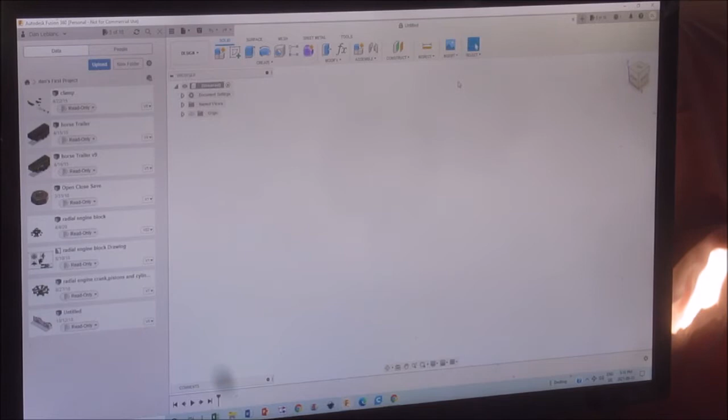The face, then select image to import. So I'm going to get my image, and if I look through here, insert from my computer. So here I am on my desktop, and it's the latest photo, the image here, and I do believe it's this one.

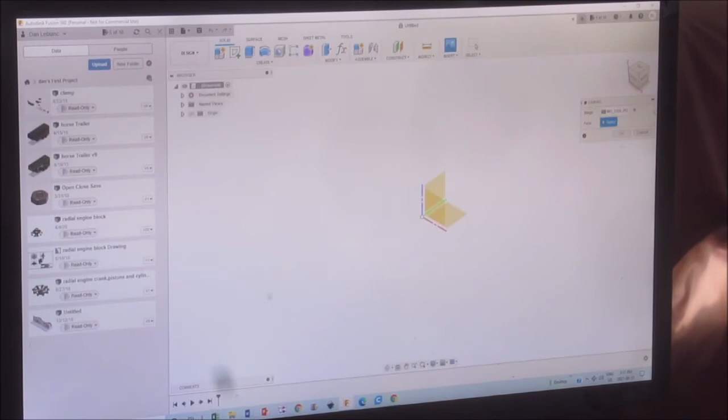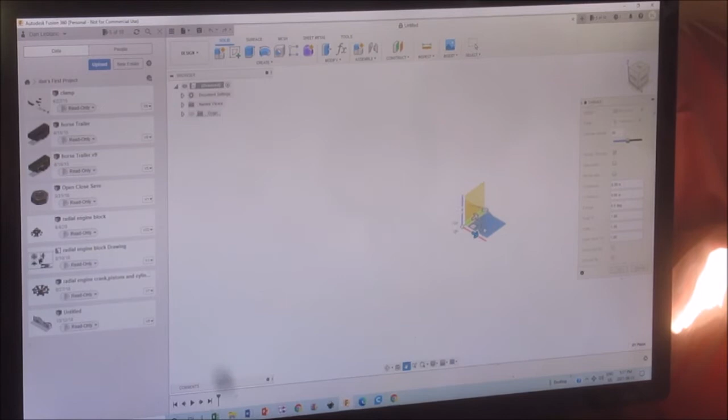Now I'm going to select the plane on my XY plane, and there's my canvas. I'm trying to zoom in and it's not working - I think I'm crashing. No? Oh, way too late. You really got a high resolution in that picture, huh? So I'm going to say OK to this and bring it into view.

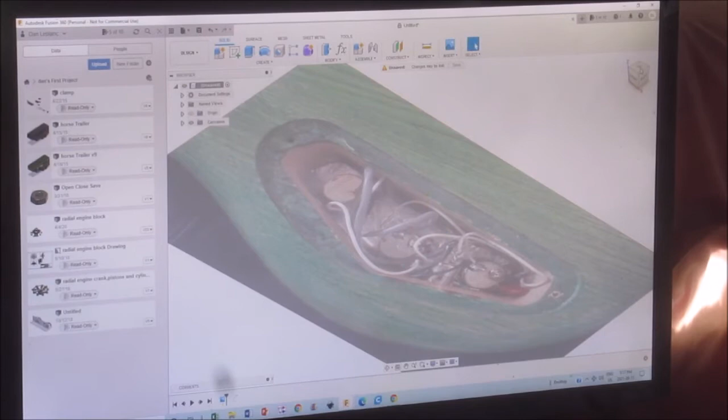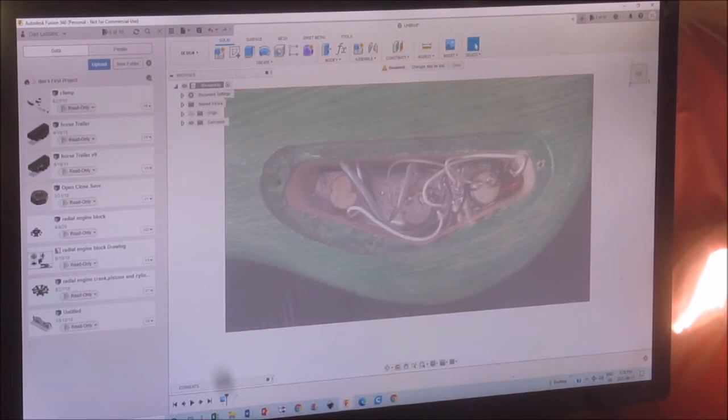It's computing graphics, and there it is. Now I'm going to draw an outline around this. And as you can see, they put an aluminum sheet or conductive sheet, and put a little capacitor in the corner and grounded it off, so it doesn't pick up any noises in the wires and whatnot.

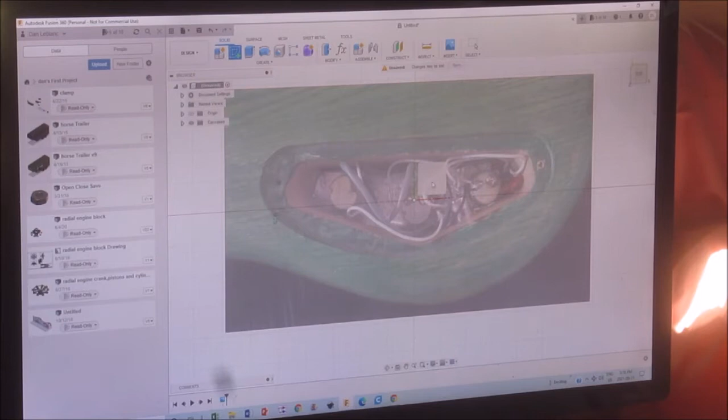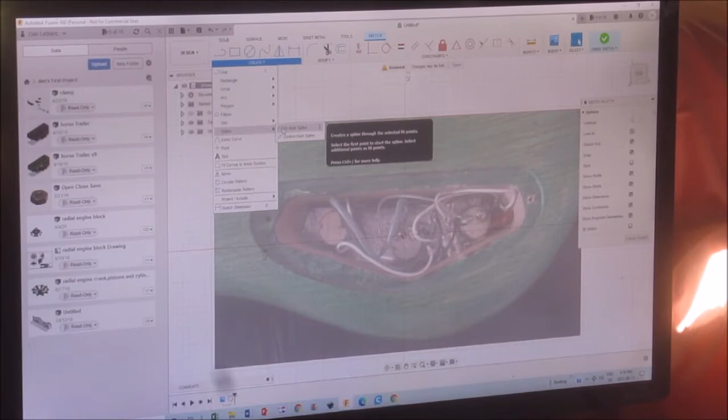Now I'm going to create a sketch here. And I'm going to use a function, not line, but spline - it creates a spline through the selected fit points. It says select the first point to start the spline and select additional points as fit points.

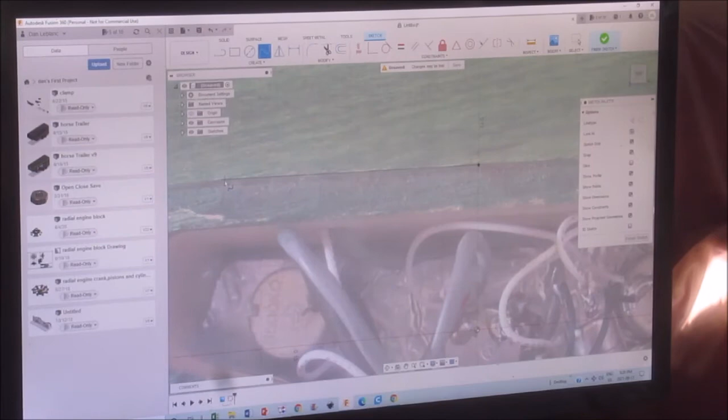The more detail I can put into it, the better it's going to be. So I'm assuming that's the correct line for it.

Look there - and there seems to be a little, it's still snapping. If I hit control, I can do a better job on this. I can sort of start giving it curvature so I can follow the outline of this drawing, and I want to keep it pressed.

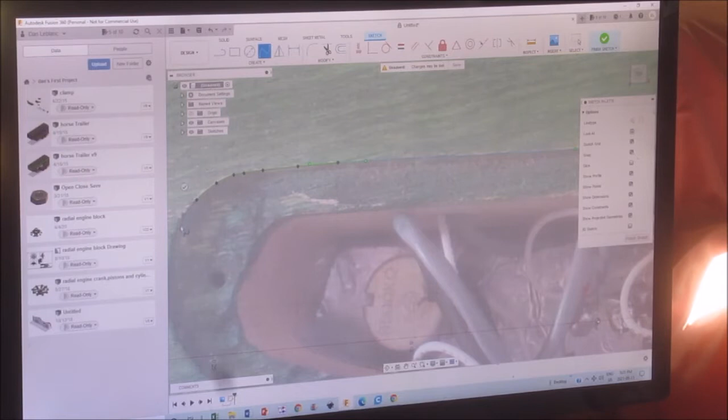So you sort of get the gist of it, right? I'm just following the shadows.

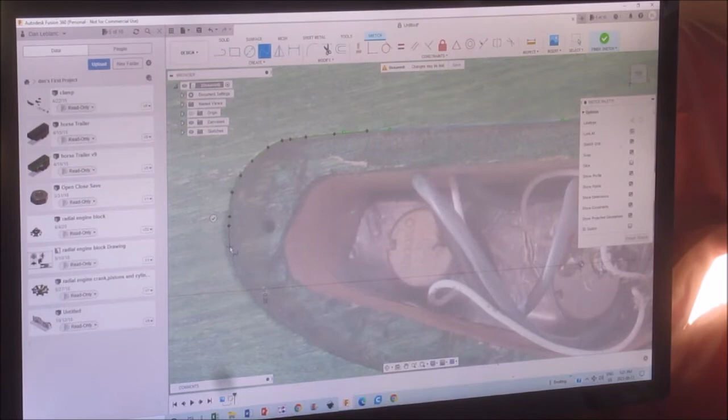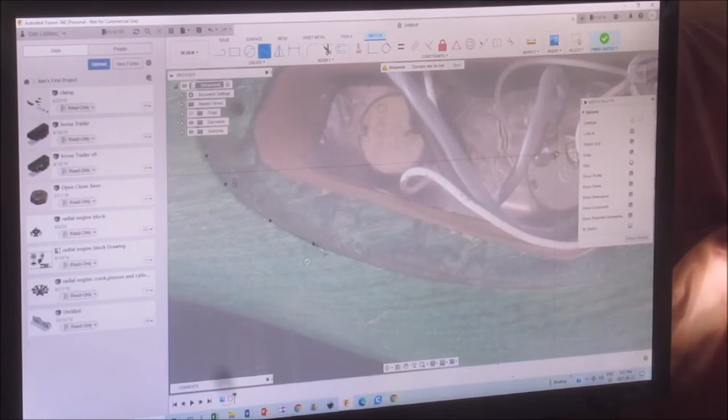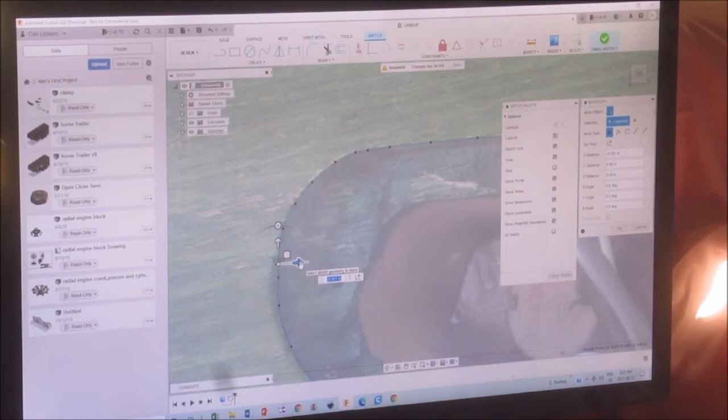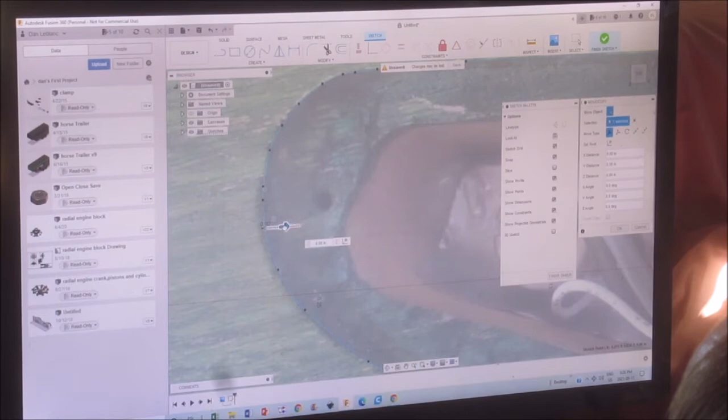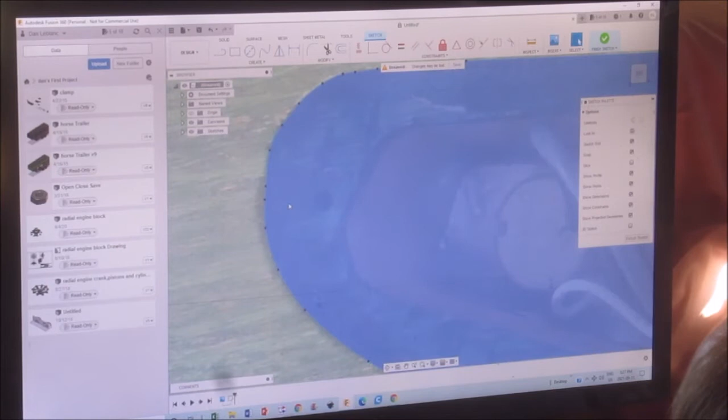I'm seeing here, you see it right there. And if I click on this one again... oh, I grabbed two at once. Here, pardon my language.

Some things I need to know, right? Like I said, I need to know the space between these two bolt holes. That'll tell me what scale to put my canvas to, and then all these proportions that I draw out on my canvas will be directly related to the real size of this plastic piece.

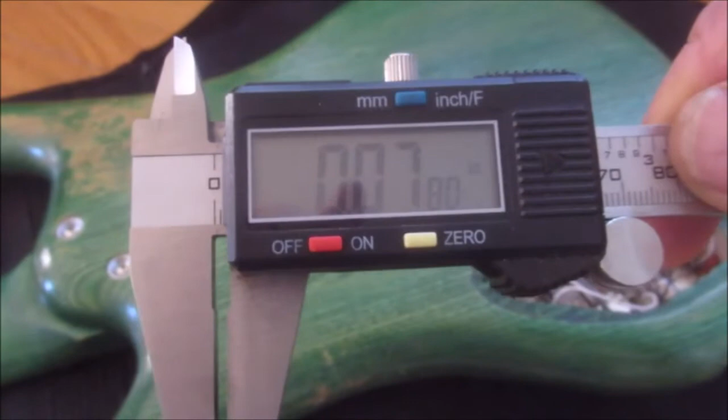And then I need to know, see that? That's a depth gauge at the end of a vernier. So I need to know the depth there, and I get a reading. It's 78 thousandths of an inch. Okay, I have my depth at 0.078.

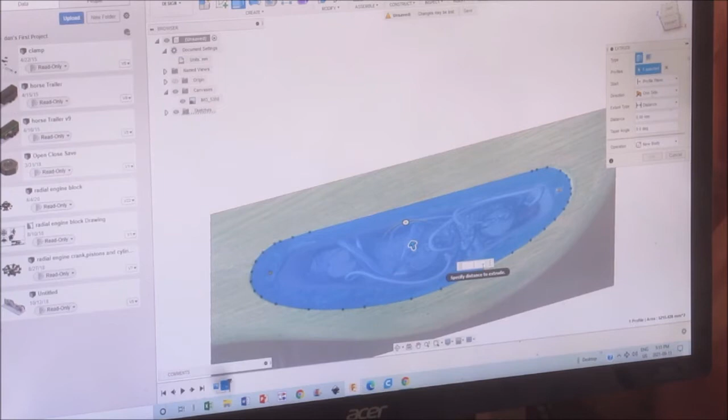I can finish my sketch right here, and then click on this. I want to press pull, and I'm going to go—it's in thousandths, 0.078 thousandths. Click OK.

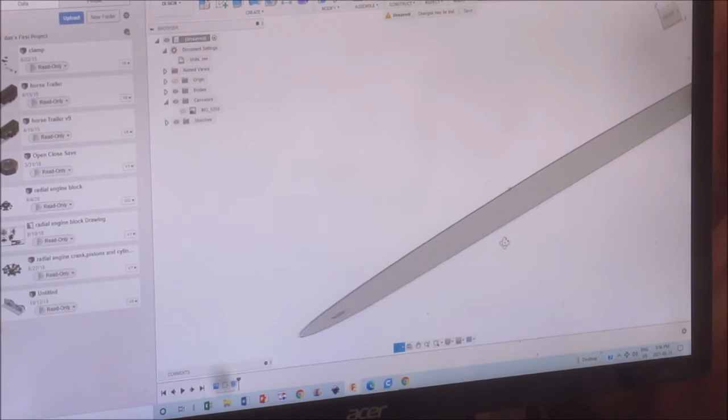And if I turn off my canvas, I have it here. Okay, and I want to measure, make sure—select that edge to this edge.

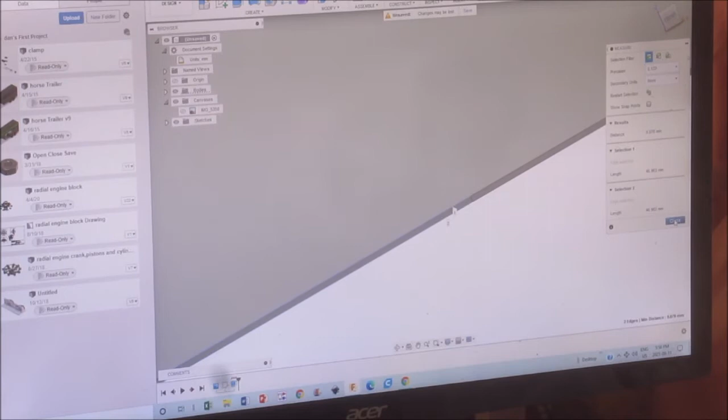Okay, now it says in millimeters. I should have typed in inches. I thought it seemed a little bit thin. So I'm going to go here to my press pull and edit this feature. And now, instead of putting millimeter, I'll put inch. Click OK. Now that looks a lot better.

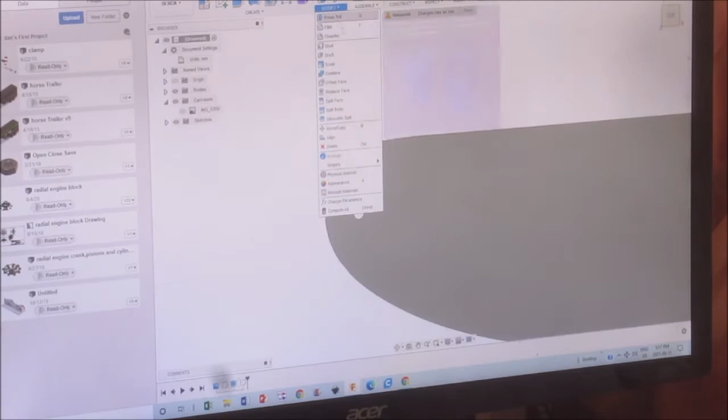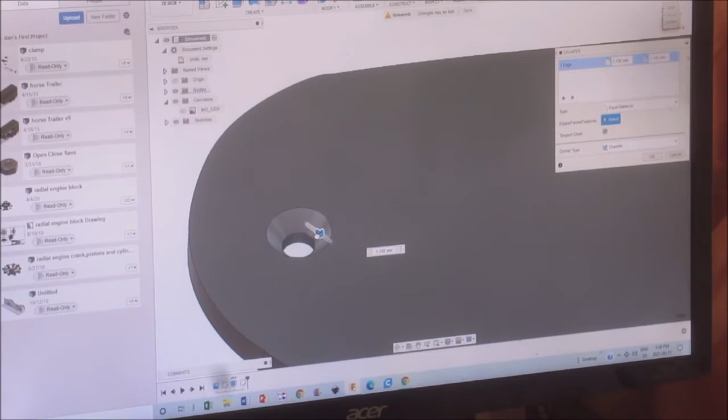That looks like the real deal. Modify this feature, I can put a chamfer. So if I select the edge of this circle and bring this into view, I can chamfer this hole as such. I'm going to click OK.

And now I want to see the OD of this thing. Radius 2.8 millimeters. So I'm wondering if this will work. I don't have the screw, so it's kind of difficult.

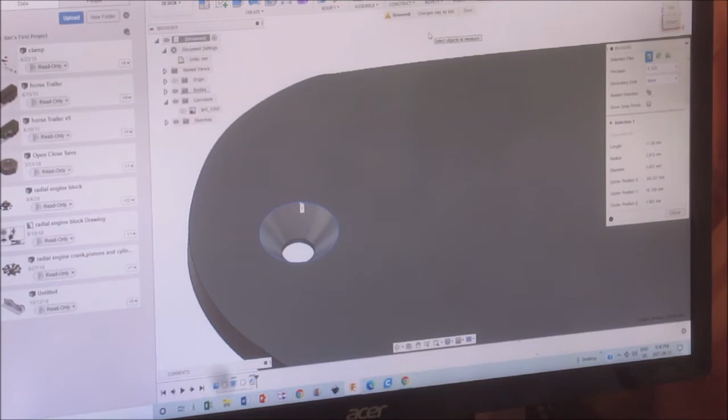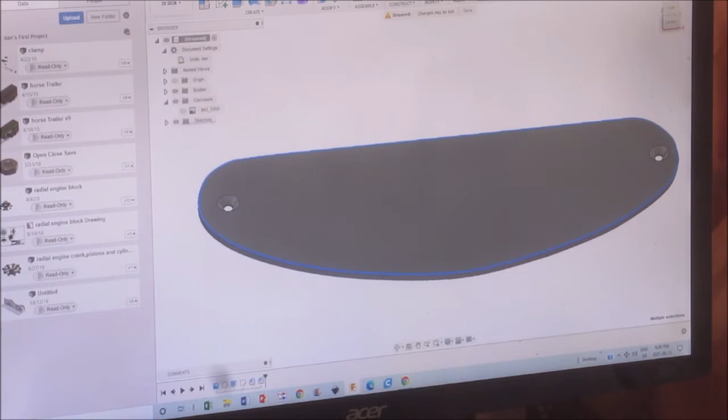And repeat this over here. Can I select these edges? Yes, I can. And I'm going to select these edges, and I'm going to put a fillet on these. Modify, fillet, a very small fillet. Oh geez, my selections went away.

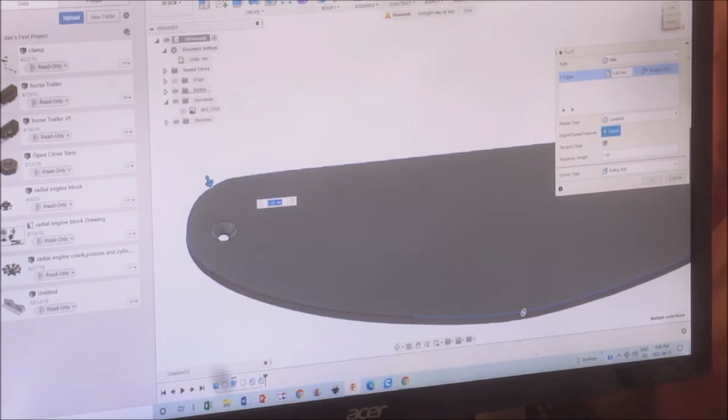Oh, I can choose the format of it, right? STL binary, STL, or 3MF. 3MF means manufacturing, I believe—3D manufacturing. And a refinement is medium, which is fine for this. I can preview the mesh if I want.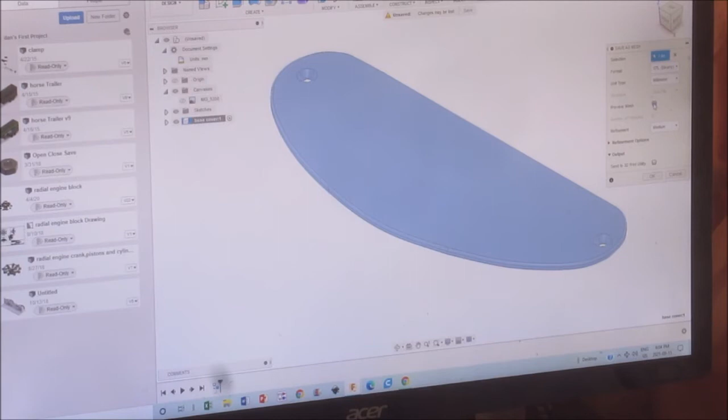Number of triangles, nothing happened. If I say STL binary, create a mesh—there it is, 6,124 triangles for this piece. And I want to save it. I'm going to click OK.

Here we are on Cura. And there are—oh, I got a new version of this, 4.11, and this is 4.9 version. Okay.

I'm going to be using black PLA, and it is eSUN black PLA. And the nozzle here, if I go to here, I can set nozzle sizes anywhere from 0.2 to 1 millimeter nozzles. And it's black PLA. Okay, I have all these manufacturers I can choose from, and I chose black PLA from eSUN.

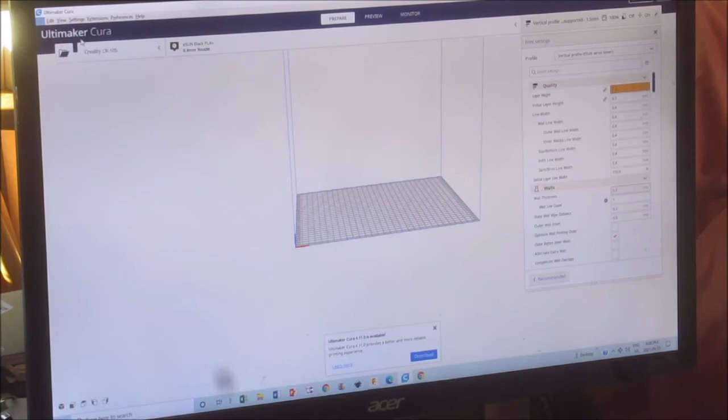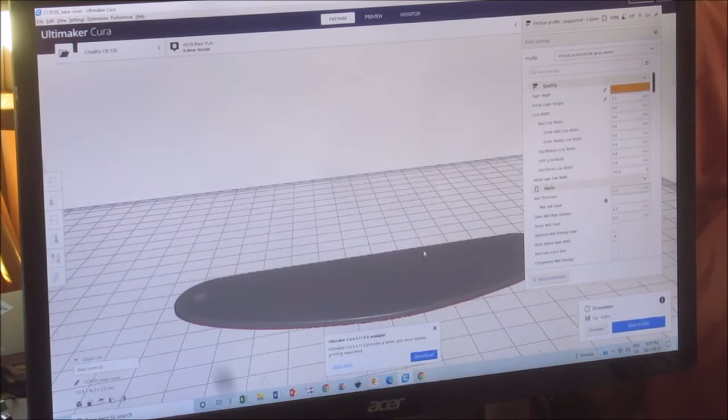And I'm going to go get my file, open file, and the file's on my desktop, and it is right here, CCR10S base cover, STL model. Click on that, open that, there it is, and all I have to know if it's flipped upside down or not, and it's not. Okay, now since this is somewhat thin, I don't want it to warp.

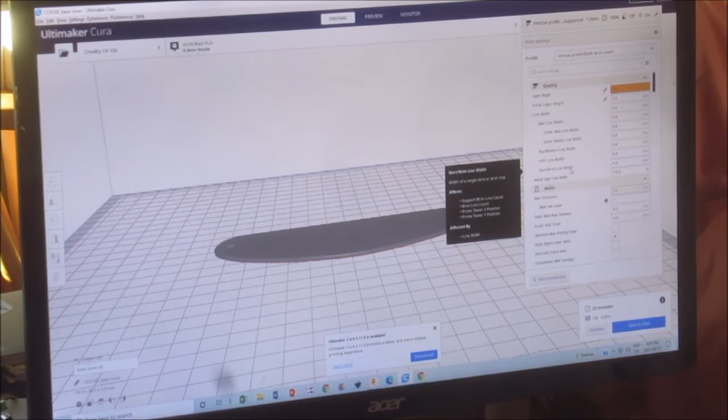So you want to make sure you have a brim around this which dissipates the heat. Okay, brim skirt line width—width of a single skirt or brim line. So I'm going to scroll down here and go to...

Infill density, I want 100%. That's where you might get elephant's foot, they call that, when it starts peeling off the corners. I hope it doesn't happen.

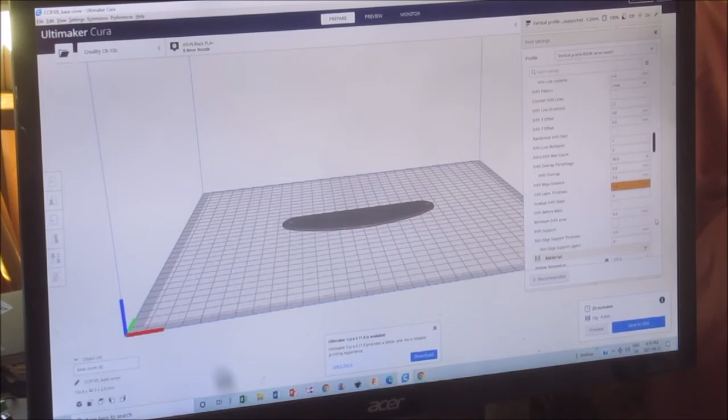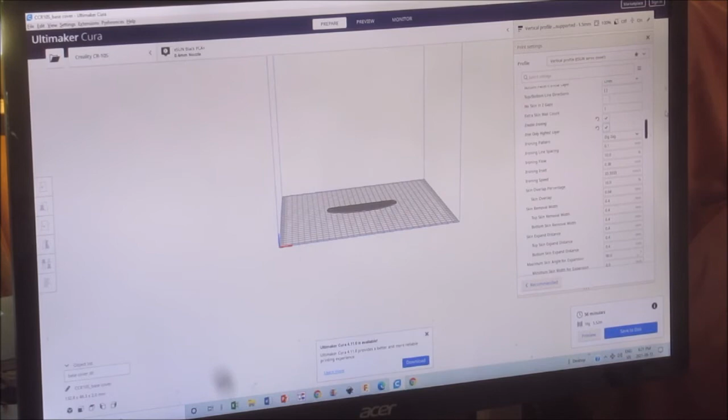Okay, so what I was looking for was the ironing command. I can iron the top level or all of it. And to iron means I'm actually going to print at a level height of 1 millimeter at a lower flow rate to smooth out all the little holes that are left behind from the previous level.

I started using these guys. The filament does a pretty good job, right? And this is what I'm using right there: 1.75 millimeter black filament. I use the highest temperature on there—get better results.

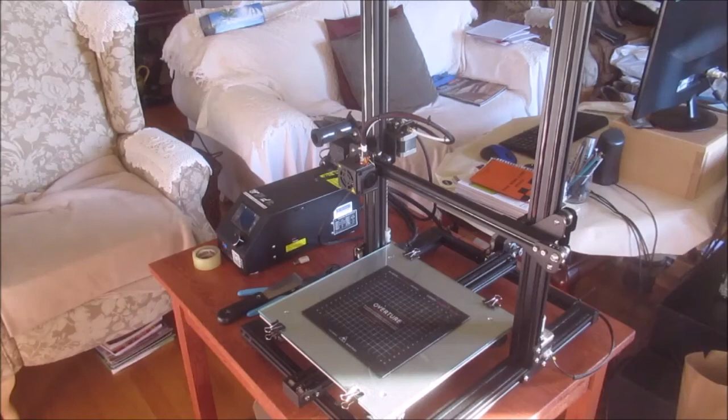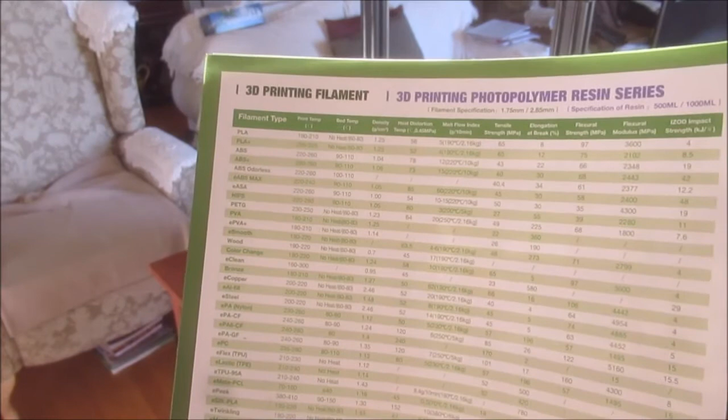And they provide you with information here: polymer resin, print temperatures, and all this stuff—bed temperature, print temperature, heat distortion, density, melt flow index, not sure, tensile strength. These guys. And I have it—it comes in this sealed package so moisture doesn't get in there, because printing material with moisture causes bubbles and defects in the print.

Okay, now I haven't started this in a while. I don't know if it's going to load up right away or if I have to do some tinkering with it.

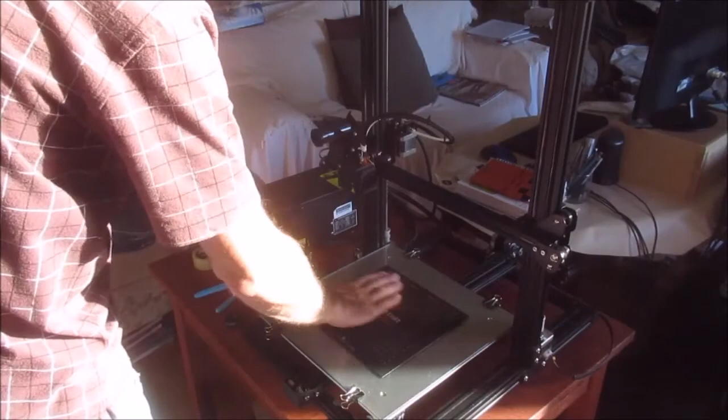Okay, so let's turn this on. I've loaded up my chip.

Since it's not going to go at a higher level, I'm not going to spool it out through the top, I'm going to spool it out through the bottom. That way I make sure I don't get any kinks in the filament. Okay, so this is empty right now. I'm just going to cut off a piece to get that kink out of it. Okay, and this is pretty hot.

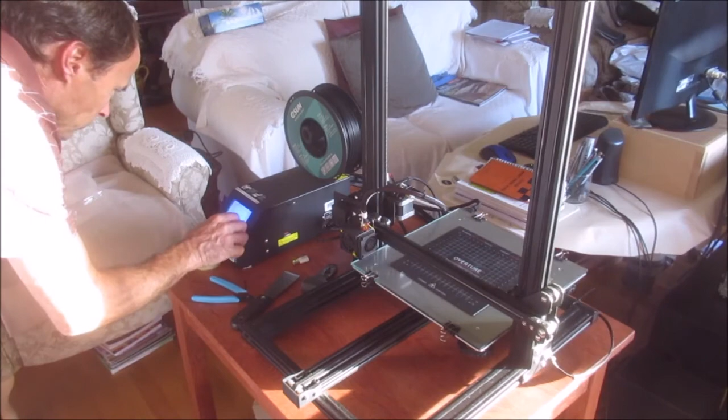So now I'm just going to bring up the file. Print from SD card. So the print has started. It's printing the brim.

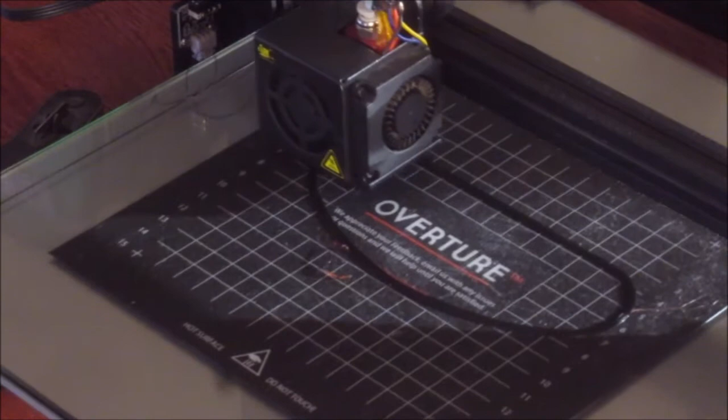It should do 8 millimeters, and we're up to about 5. And it's doing the inside first. This actually prints nice.

Well, the splines and the sketch were correct, but the machine will print the trajectories, or the vectors, that are given by the CAD program. And there's tool offset, okay?

If you don't know the diameter, let's say of an end mill on a CNC machine, let's say the machine thinks it has a 1/2 inch end mill, yet you really have a 3/4 inch end mill. Well, you're taking off from the center, the radius, instead of being 1/4, you're taking off 3/8 of an inch. So whatever you do is going to be 1/4 of an inch smaller overall. Like if it was an oval or circle, overall it's going to be 1/4 of an inch smaller.

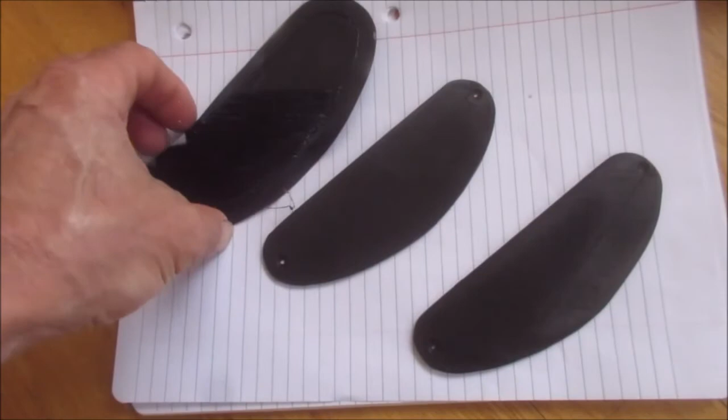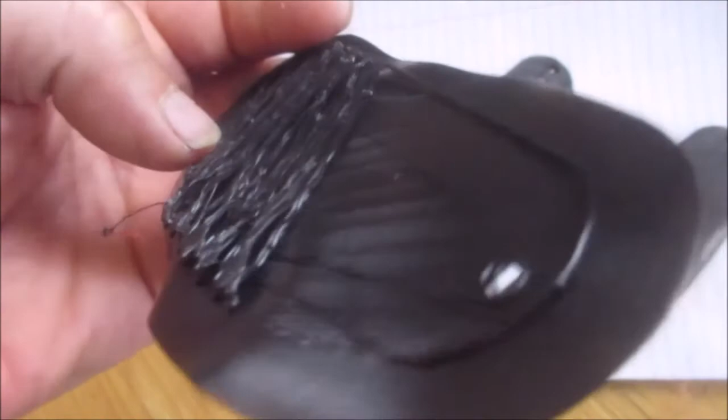Okay, so third try. This was my first try, and what happened here was, between levels I had 1.5, so it's not even touching, right? First level was set at 0.2 millimeters or something, or maybe even slighter than that, maybe 0.15.

Okay, second try, the ironing features came out okay, and it's in a zigzag fashion. And this travel here is because the machine is set for printing aircraft parts, and if you don't want any blob build up in an aircraft part, you don't want the nozzle to leave the print.

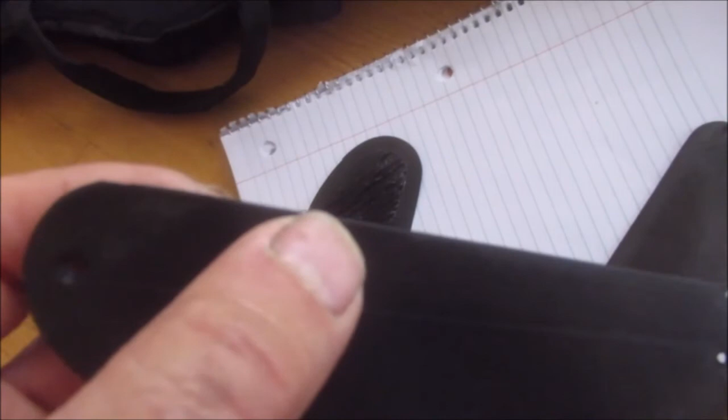I should have put a Z-retract in it between my jumps, but this way it leaves the part seamless. There are no seams to it. It's not like I'm doing one level starting off and going back to the same spot, starting off the next level and doing that every time, and then when you look from the side you see a big seam.

So this part here is slightly too big. It was bang off the measurements, but it was slightly too big because of the way it was printed.

So next time over, I took the same outline and did an offset by 1.25 of a millimeter, which is really an offset of 0.625. And this piece fits. Okay, if I put a screw on either side, it is flush and it fits.